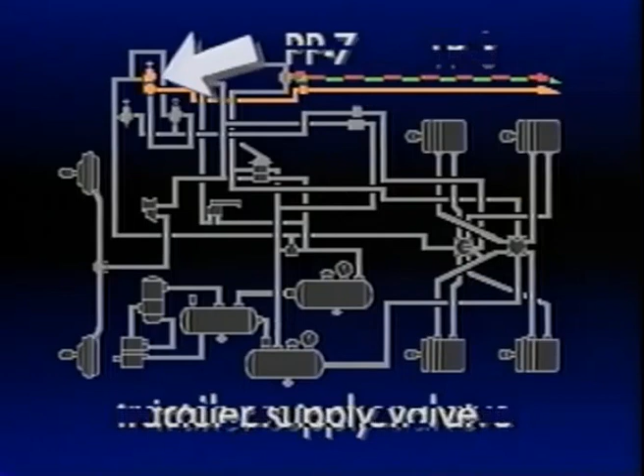There are a number of different valves that can be used. In this program, we'll look at the most basic and popular, the TP3 tractor protection valve, and a control called the PP7 trailer supply valve.

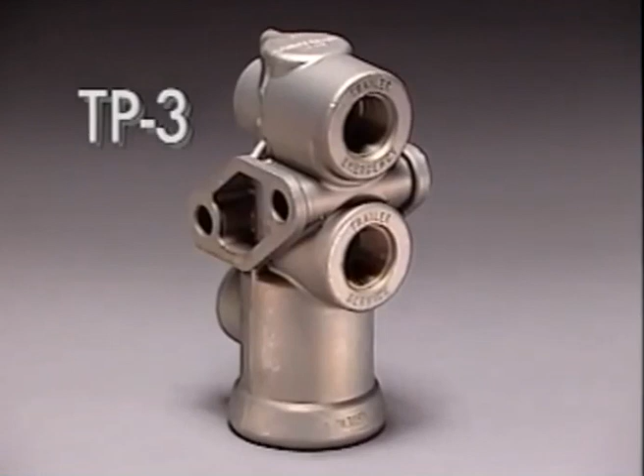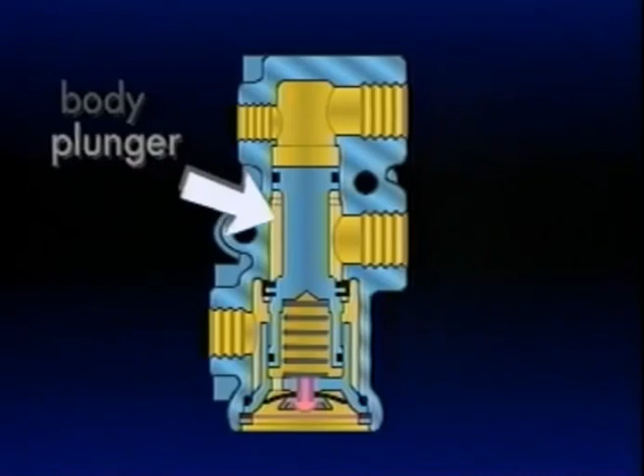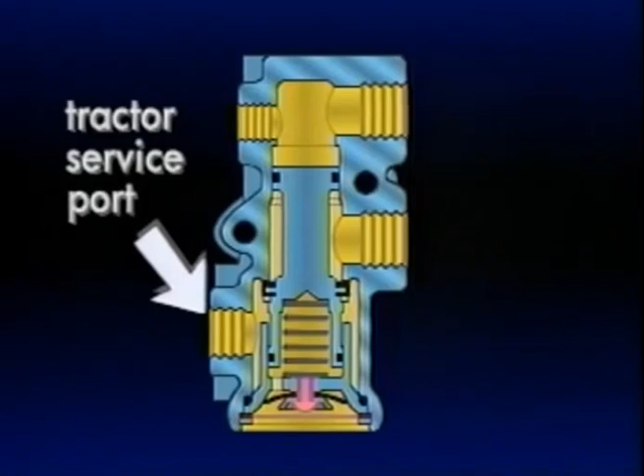Mounted at the rear of the cab, the TP3 tractor protection valve functions as an on-off control for the service line, which carries brake applications from the tractor to the trailer. The TP3 is a simple valve internally and consists of a body, the plunger with its integral service valve, and a spring. There are four air connections on the TP3, the tractor supply and tractor service ports on one side, and trailer supply and trailer service ports on the opposite side of the body. Each is identified with cast-in lettering.

Air exerts a force on the plunger as it flows through the TP3 from the tractor supply to the trailer supply port on its way to the trailer air system. When air pressure on the plunger exceeds approximately 45 psi, the plunger moves, opening the service inlet valve. With the service valve open, brake application pressure is free to flow from the tractor to the trailer brake system.

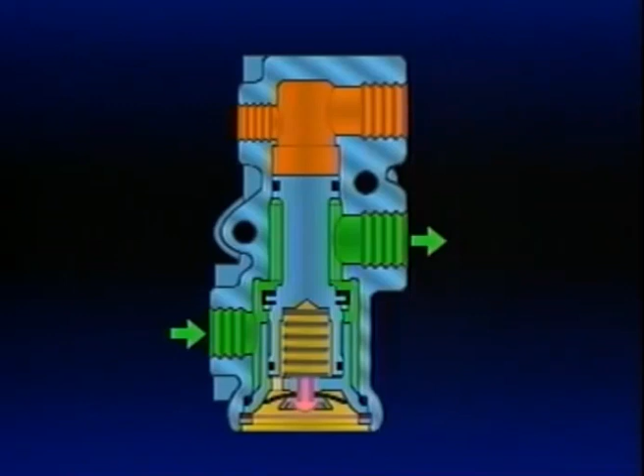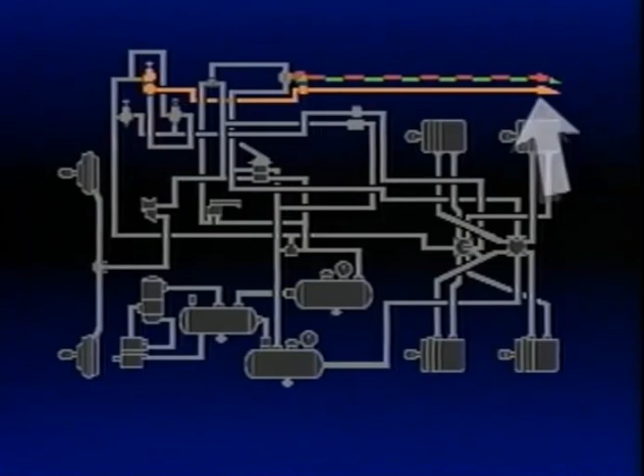The other half of the team, the PP7 trailer supply valve, is mounted on the vehicle dash and is easily distinguished by its red octagonal control button. The PP7 controls the flow of supply air to the TP3 and subsequently to the trailer. In addition, it synchronizes the tractor protection system with the tractor parking system. One-button parking control is thus achieved.

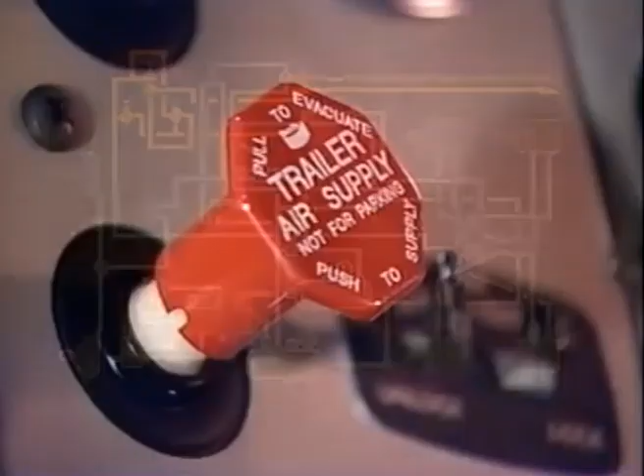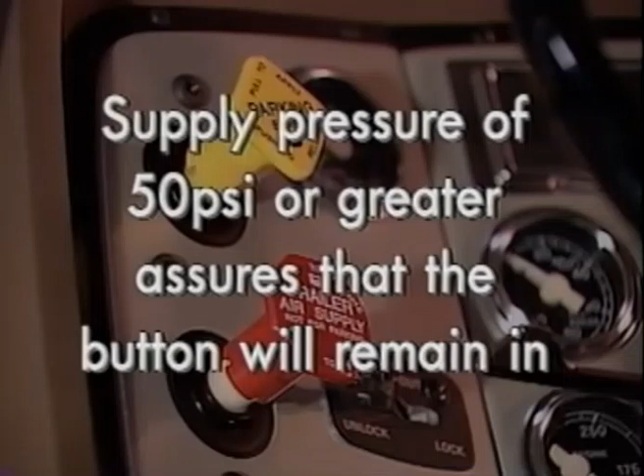Like the PP1, the PP7 button must be pushed in manually, but will pop out and exhaust automatically if the air supply drops below approximately 40 psi. Supply pressure of 50 psi or greater assures that the button will remain in until manually pulled or supply pressure drops below 40 psi. The PP7 is a combination of two pressure-sensitive on-off control valves in one body.

The upper portion is almost identical to the PP1 push-pull control we studied in Part 3 of this series, while the lower half contains an SV1 synchro valve.

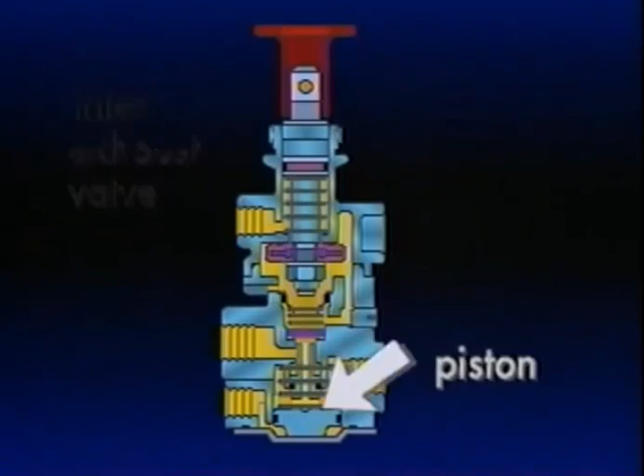The upper half of the PP7 consists of a control button, plunger, spring, and inlet exhaust valve. The lower half contains a piston, piston return spring, inlet exhaust valve, and valve spring.

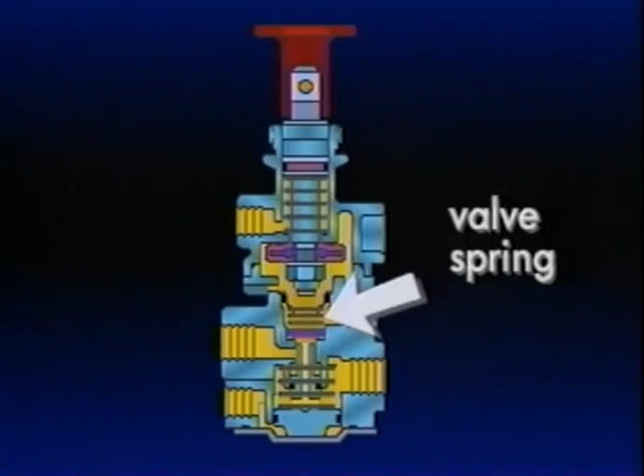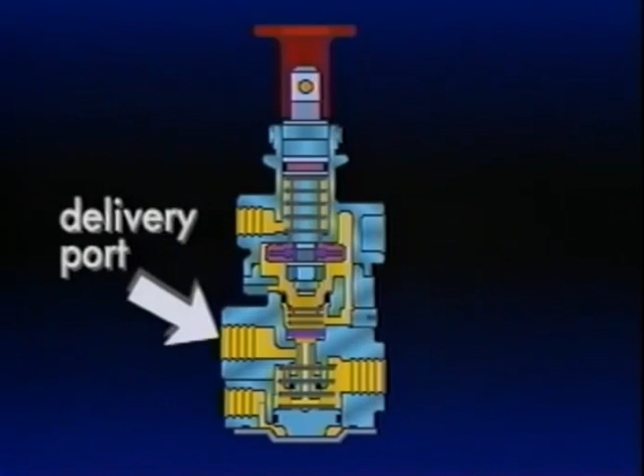In addition to an exhaust vent and exhaust port, the PP7 body has three air connections: supply port, delivery port, and control port. The supply port is connected to the same double check valve that supplies the PP1 park control. It is therefore assured a constant supply of air pressure regardless of a failure in one of the service reservoirs.

The delivery of the PP7 is connected to the tractor supply port of the TP3, and the control port is connected to the delivery of the PP1 trailer release valve.

With the vehicle parked and no air pressure in the system, the PP7 control button is out. The inlets of both valves inside the PP7 are closed, and the exhausts are open.

When tractor system pressure builds to 50 psi or greater, the PP7 can be depressed and will remain in. With the plunger inlet open and the exhaust closed, air flows from the supply port to the closed synchro valve inlet. The synchro valve piston remains down due to a lack of air pressure at the control port. The PP7 delivery port remains open to exhaust.

When the PP1 park control is depressed, air pressure simultaneously releases the tractor spring brakes and is delivered to the PP7 control port. Air pressure at the PP7 control port moves the synchro valve piston, sealing its exhaust passage and opening the inlet valve.

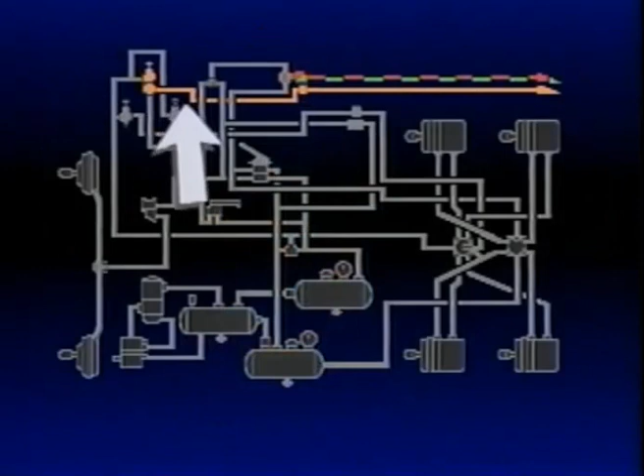Air from the push-pull section of the PP7 flows past the open synchro valve inlet and out the delivery port, then through the TP3 to charge the trailer reservoirs.

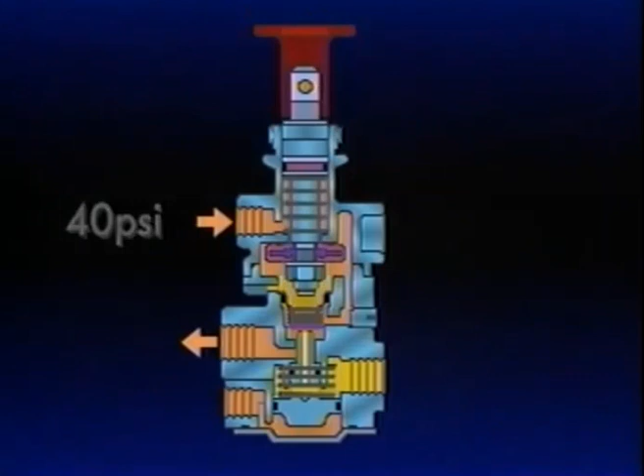If tractor air system pressure falls to approximately 40 psi during vehicle operation, the PP7 button will pop out. Air from the trailer's supply line is exhausted at the PP7. This preserves the last 40 psi of tractor air pressure and causes the trailer parking brakes to apply. Note that the synchro piston remains unaffected.

If the PP7 button is held in and tractor air pressure has dropped to approximately 20 psi, the synchro piston automatically moves into the exhaust position. Although the driver continues to hold the button down, the trailer's supply line is exhausted and trailer parking brakes are fully applied.

During a trailer breakaway or a sudden complete trailer supply line failure, the PP7 button will pop out automatically. The tractor air system will retain between 40 psi and full system pressure depending upon the location and severity of the failure. Air escaping from the failed supply line cannot be replaced through the PP7 supply port as fast as it's lost. This causes pressure inside the PP7 to drop below the 40 psi pop-out pressure, even though supply port pressure is much higher.

Because of the synchro valve section in the PP7, the tractor protection system is linked to the tractor parking brakes.

To park a tractor-trailer combination, the PP1 park control is pulled out. Air is exhausted from the tractor spring brakes and from the PP7 control port. With no air pressure at the PP7 control port, the synchro valve piston moves, seating the inlet valve and opening the exhaust passage between the PP7 delivery and exhaust ports. Air from the trailer supply line returns to the PP7 and is exhausted, causing the trailer parking brakes to apply.

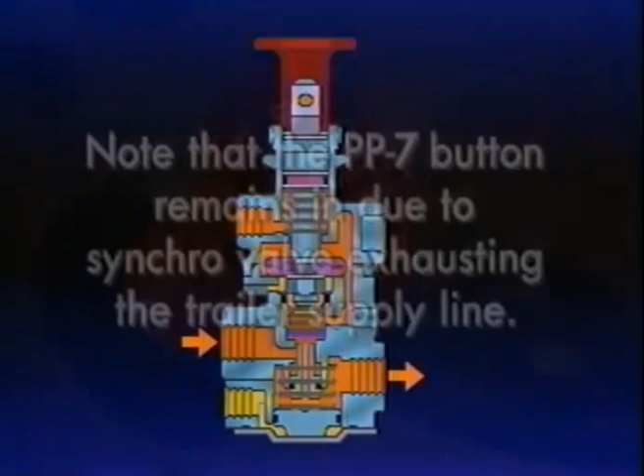Note that the PP7 button remains in. This is due to the PP7 synchro valve exhausting the trailer supply line.

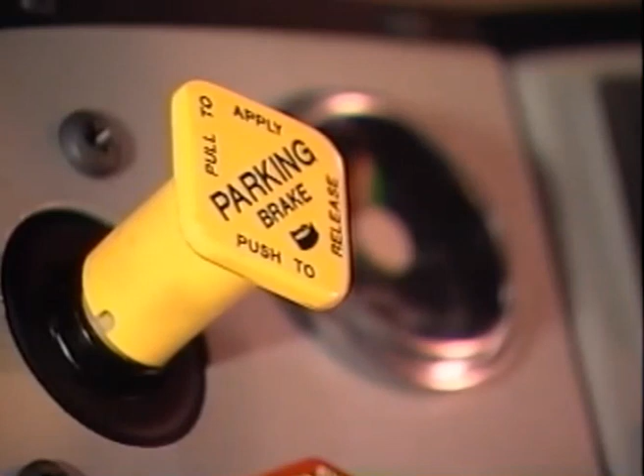Pushing the PP1 park control in releases the tractor parking brakes and delivers air to the PP7 control port. This causes the synchro valve piston to close its exhaust and open the inlet. The trailer supply line is recharged and the trailer parking brakes release.

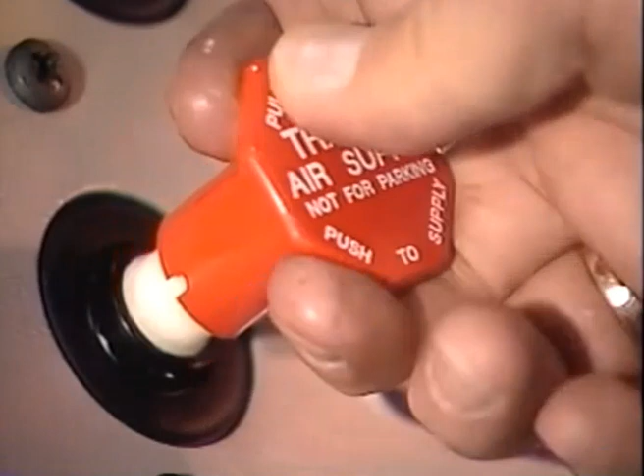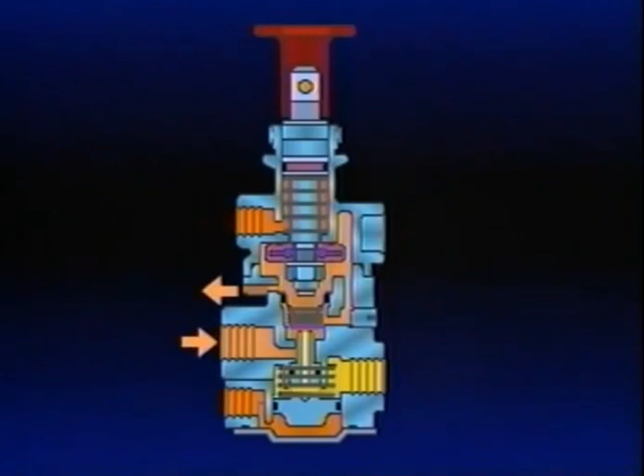To disconnect the tractor and trailer, the operator must pull the PP7 button. Pulling the button closes the plunger inlet and unseats the exhaust valve. Air that was flowing out the delivery port returns to the PP7 and exhausts from its vent.

Test the tractor protection system by pulling the PP7 out and making and holding a brake application. Apply a soap solution to the trailer service and supply line hose couplings to see if the TP3 or PP7 is leaking.

Our basic tractor system is almost complete, but before moving on, we must consider one additional device, the DS2 double check valve and stoplight switch.

We learned in Part 2 that vehicles are equipped with dual brake systems, a protected braking circuit for the front axle brakes and a separate circuit for the rear. Since there is only one service line leading to the trailer, one or the other of the two braking circuits must be chosen to apply the trailer brakes. And of course, the stoplights must be lighted regardless of which is chosen.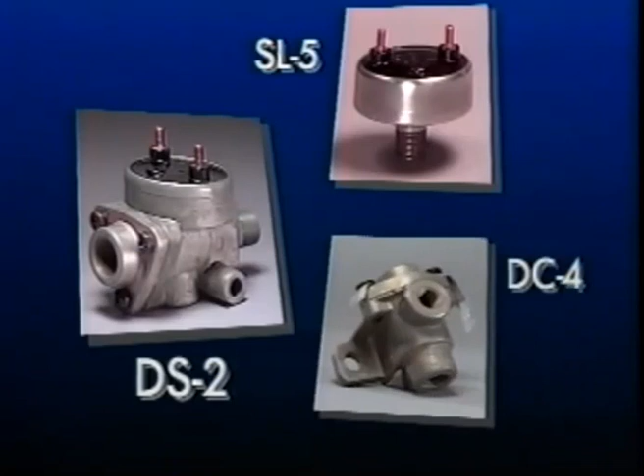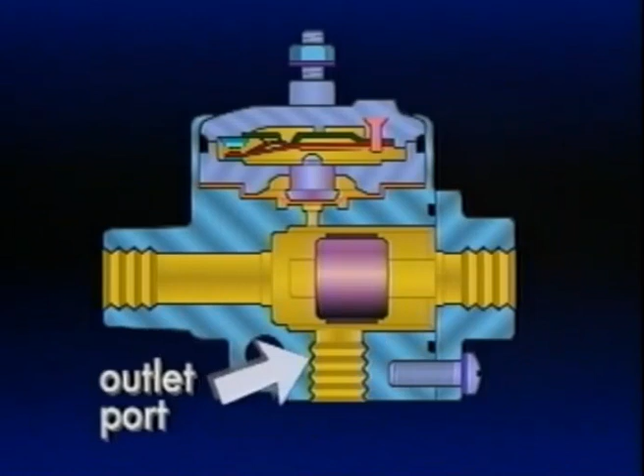That's the function of the DS2. It's a combination of two valves, the SL5 stoplight switch from Part 2 and the double check valve from Part 3. Like a standard double check valve, the DS2 has two inlet ports and one outlet port. The stoplight switch is positioned in the middle of the double check valve opposite the single outlet port. A shuttle riding in a guide travels between the two inlets.

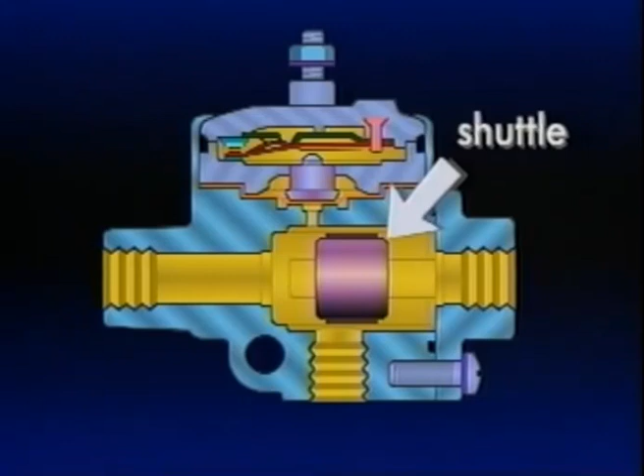Lines from the front and rear axle brake circuits connect to the inlet ports on opposite sides of the DS2. The outlet is normally mounted to the tractor service port of the TP3 tractor protection valve.

During normal operation, brake application air from both brake circuits enters the DS2 inlet ports. Since the rear axle brake circuit pressure is slightly higher, the shuttle will move to close the front circuit side, at the same time moving the stoplight piston to light the brake lights. Rear axle application air flows to the outlet port, then through the TP3 and on to apply the trailer brakes.

If one brake circuit on the tractor loses air pressure, brake applications from the remaining circuit would still flow through the DS2 to apply the trailer brakes and light the stoplights.

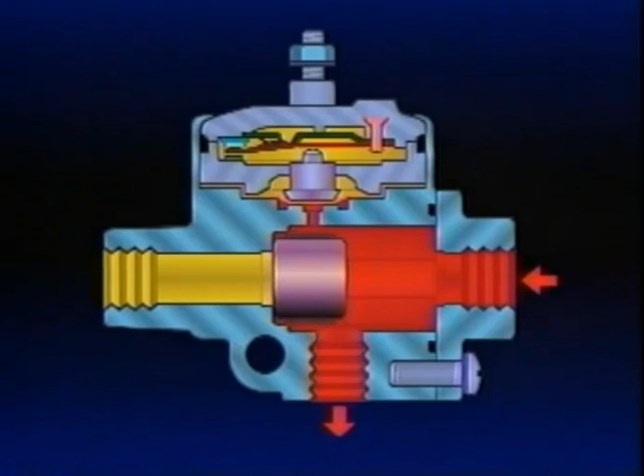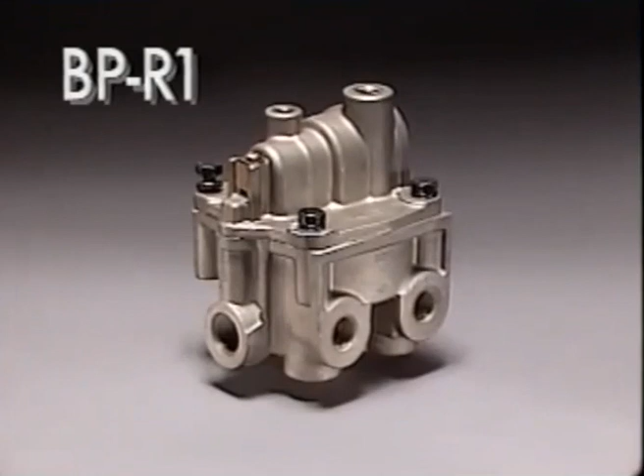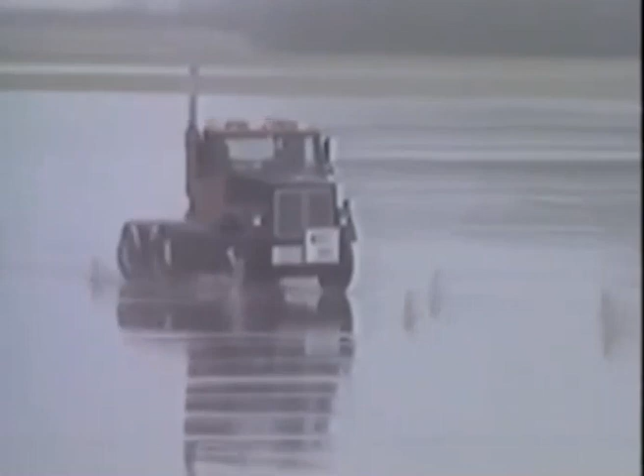Before going on to the trailer brake system, there is one accessory that should be considered: the BPR1 bobtail proportioning relay valve. The BPR1 combines a relay valve with a proportioning valve. It was designed for use in tractor brake systems only and replaces the standard R12 service relay presented in Part 2. The BPR1 improves control and reduces stopping distances by proportioning brake applications to the lighter rear axle brakes during bobtail tractor operation.

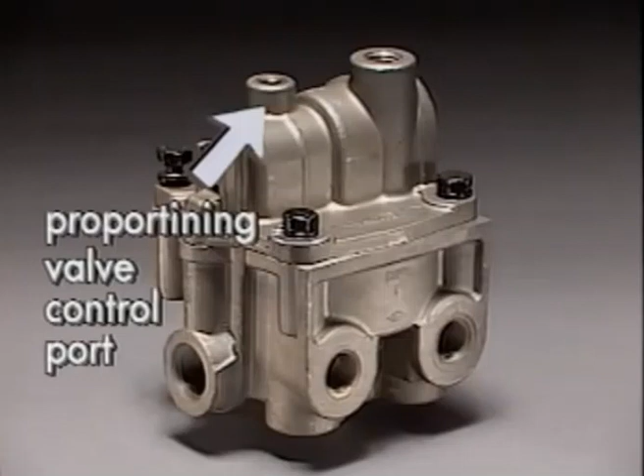The BPR1 body contains a standard service brake relay valve, while the cover houses the proportioning valve. There are 4 delivery ports, 2 supply ports, 1 control port for the relay valve, and another for the proportioning valve. All air connections are identified with cast-in letters. With the exception of the additional proportioning valve control port, the BPR1 air connections are exactly the same as the R12 relay it replaces.

This port is connected to the air line running between the PP7 trailer supply valve and TP3 tractor protection valve. During tractor-trailer operation, the PP7 delivers air pressure to the trailer and to the control port of the BPR1. So long as control port air pressure is present, the BPR1 functions as a standard service relay valve and delivers full braking pressure to the tractor's rear service chambers.

When the PP7 trailer supply valve is pulled, the trailer supply line is exhausted. Pressure is removed from the BPR1 control port, signaling that the tractor is now in bobtail operation. With the weight of the trailer removed, the tractor rear brakes are overpowered.

In bobtail operation, the front brakes are capable of doing more to stop the vehicle than the rear brakes. They can use a much higher application pressure than the rear brakes. When the driver makes an application strong enough to take advantage of the stopping power of the front brakes, the rears skid and vehicle stability is diminished.

The BPR1 compensates for this by reducing application pressure to the rear brakes only and permits the driver to apply the foot valve in a normal manner. This takes full advantage of the front brakes without locking the rears. Vehicle stopping distances and stability are improved.

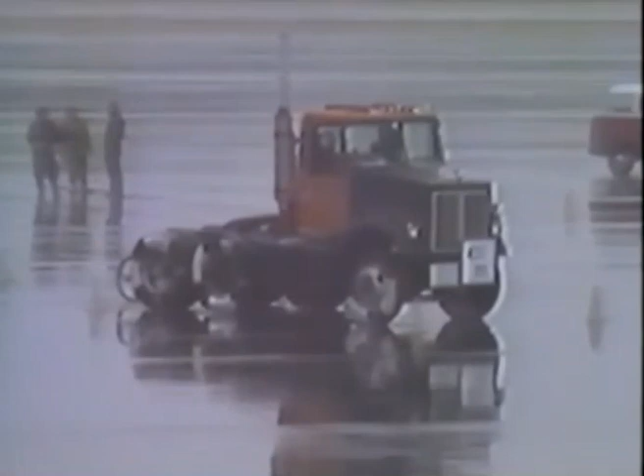Here's an important tip. Only vented dummy hose couplings can be used with the BPR1, and the vent must be open. With the addition of the BPR1, the basic tractor system is complete.

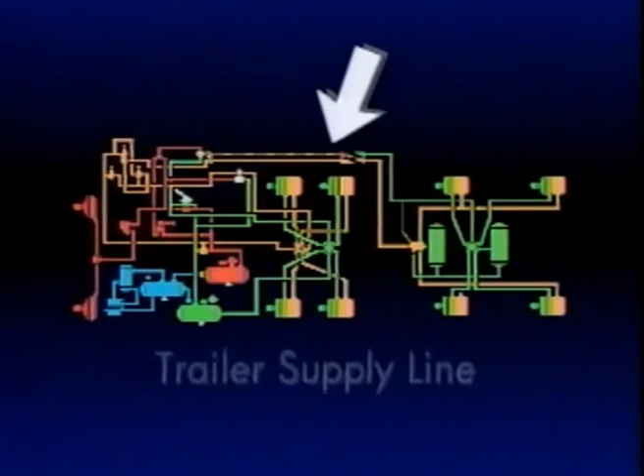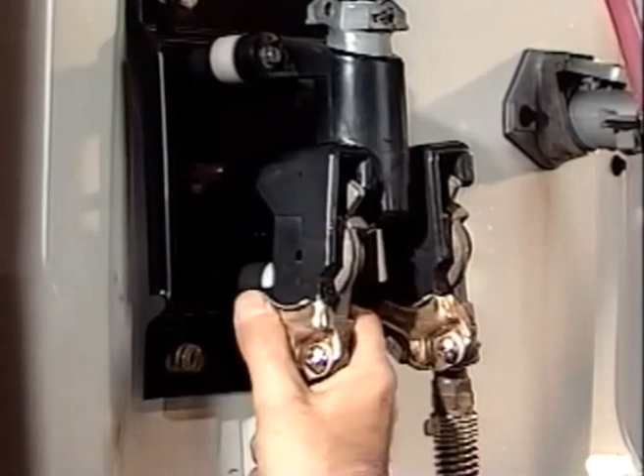Let's now turn our attention to the trailer and look at a schematic of the entire system. The two lines that carry air into the trailer, supply and service lines, are connected to their corresponding air lines from the tractor. A hose coupling, or glad hands, installed at the front or nose of the trailer connect these lines.

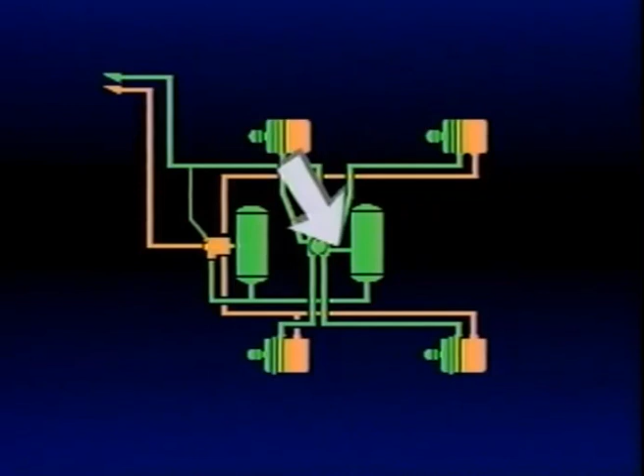The trailer reservoirs serve the same function as they do on the tractor. Two reservoirs are used because this trailer has two axles, and Safety Standard 121 requires a minimum reservoir volume for trailer service brakes. An R12 relay valve, identical in operation and function to the one described in Part 2, is attached to one of the two reservoirs. Its delivery lines are connected to the service side of 4 spring brakes, identical to those described in Part 3.

The trailer service line connects to the control port of the R12 and carries brake signals from the tractor service brake system to the R12. The R12 assures the trailer service brakes apply in unison with the tractor service brakes.

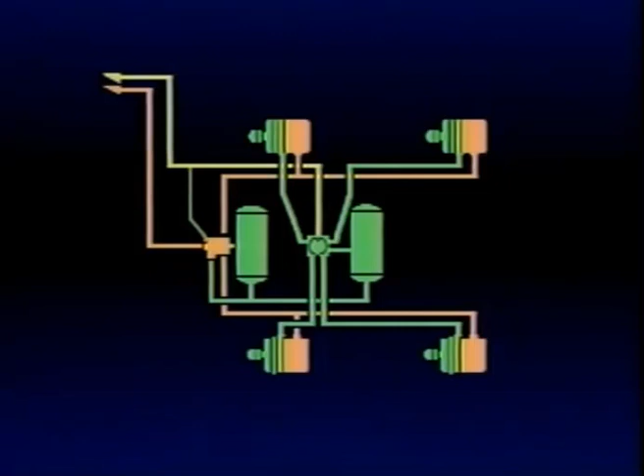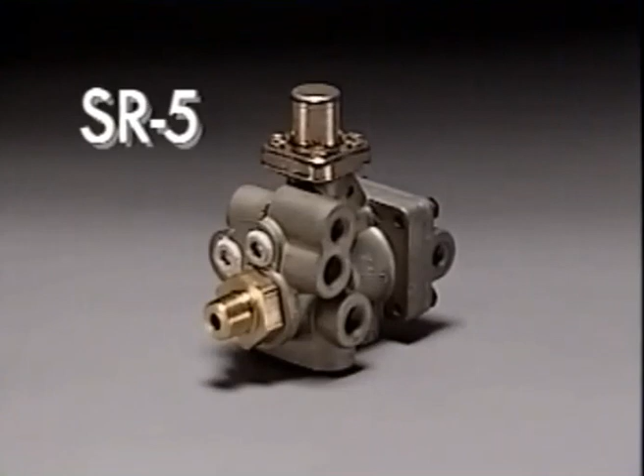The trailer service line also connects to the SR5, the last valve to be considered on the trailer brake system. The SR5 protects trailer air pressure and automatically applies trailer spring brakes in the event of a breakaway or trailer supply line failure. In addition, it permits intentional and repeated spring brake applications and releases. But it also prevents automatic applications when trailer reservoir air is lost. An optional anti-compounding feature prevents simultaneous application of service and parking brakes.

Like many of the valves we've presented, the SR5 incorporates several individual components in a single housing. A relay valve lies at the heart of the SR5 and is comprised of a control piston and inlet exhaust valve.

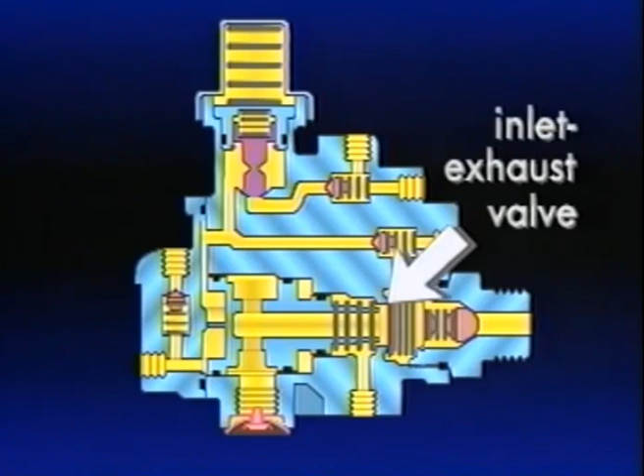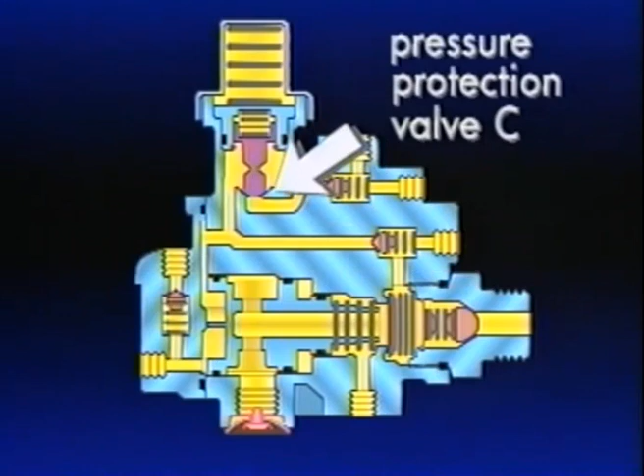Along with the relay, there are 4 single check valves, B, D, E, F, and pressure protection valve, C.

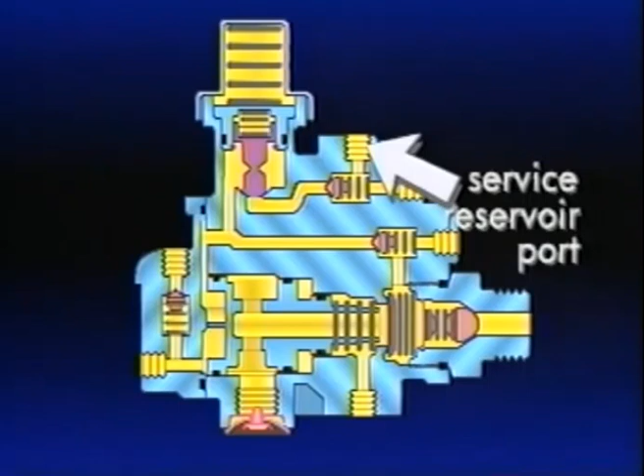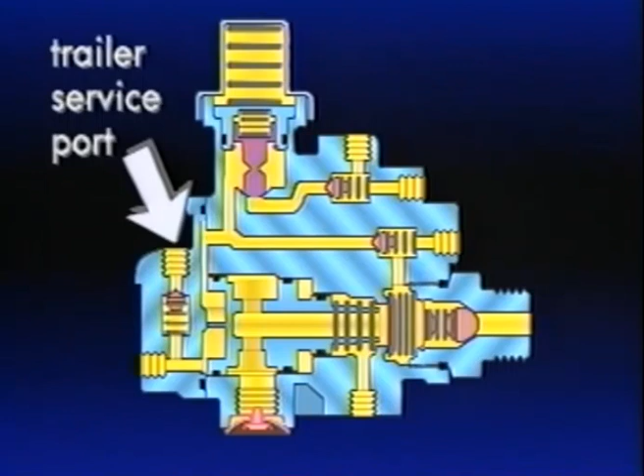A male stud is used to mount the SR5 to the reservoir. A line from the SR5 service reservoir port connects to the same reservoir. The trailer supply and service lines connect to SR5 ports with the same name. SR5 delivery ports connect to the emergency side of the spring brakes.

Let's take a look at how the SR5 operates, beginning with no air pressure in the trailer. Air flows through the trailer supply line, enters the SR5 trailer supply port, and encounters the relay piston. The relay piston moves into contact with the inlet exhaust valve, sealing the piston exhaust passage. Piston travel continues and opens the inlet.

At the same time, air flows through passage A, then check valve B, past the open inlet and into the spring brake cavities, releasing the spring brakes. Concurrently, air pressure acts on pressure protection valve C. At approximately 85 psi, valve C opens, allowing air to flow past check valve D to charge the trailer reservoirs. The trailer brake system is now ready for operation.

If air in the trailer supply line is removed for any reason, whether to park the vehicle using tractor dash controls or due to a tractor-trailer breakaway, the spring brakes will immediately apply. Without pressure at the SR5 trailer supply port, the control piston moves, closing the inlet and opening the exhaust. Air from the spring brakes flows through the passage in the control piston and the spring brakes apply. Check valves B and D, along with pressure protection valve C, close to protect air pressure in the reservoirs.

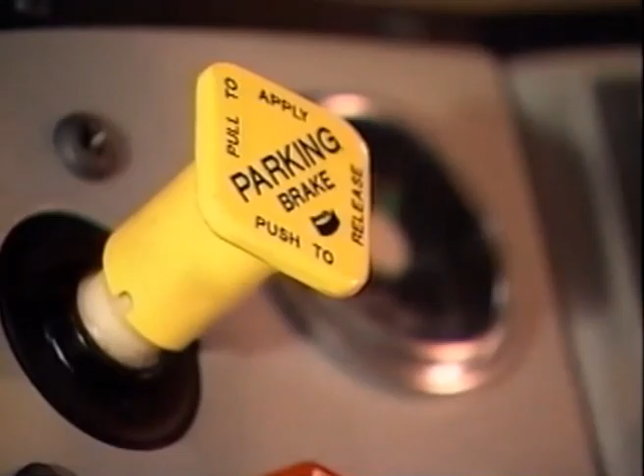If supply line pressure was exhausted due to a park application, the trailer spring brakes are easily released by actuating the dash controls in the tractor to recharge the supply line.

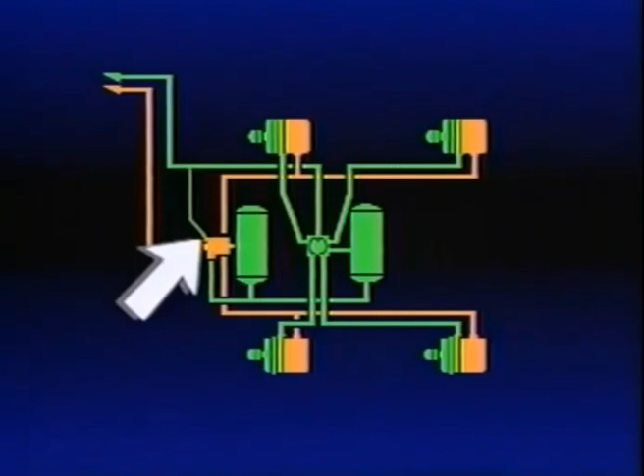The trailer service line carries the brake application air from the tractor to the trailer. That air flows to the service relay valve and SR5 trailer service port. A single check valve in the SR5 cover prevents simultaneous spring and service brake applications, which creates extra load on foundation brake components.

If a trailer service application is held at the same instant a park application is made, air in the service line flows through the single check valve, out the trailer supply line, and exhausts through the PP7 in the tractor. Further compounding is prevented by the closed tractor protection valve.

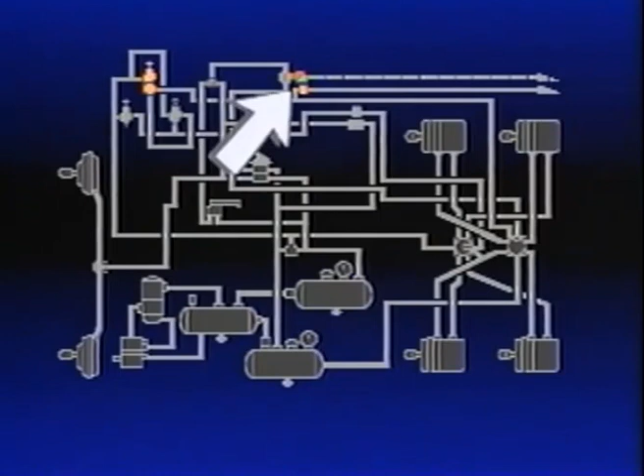Let's look at what occurs when trailer reservoir pressure is lost. First, trailer service braking is no longer available, since the R12 depends on reservoir pressure to apply the brakes.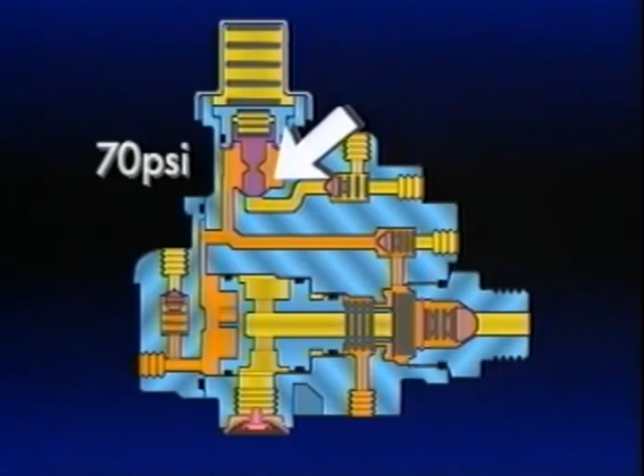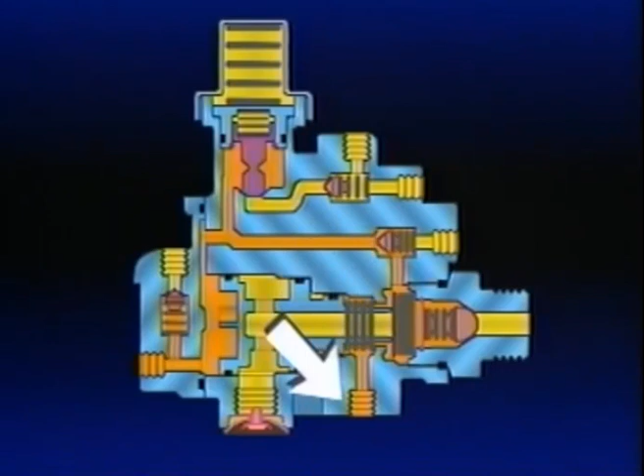Inside the SR5, pressure protection valve C will close at approximately 70 psi, retaining air pressure in the trailer supply line. The air trapped in the trailer supply line by the closed pressure protection valve will continue to hold the piston's inlet valve open, supplying air to the spring brakes. Automatic spring brake application is prevented. However, trailer supply line air can be used to apply and release the trailer's spring brakes repeatedly.

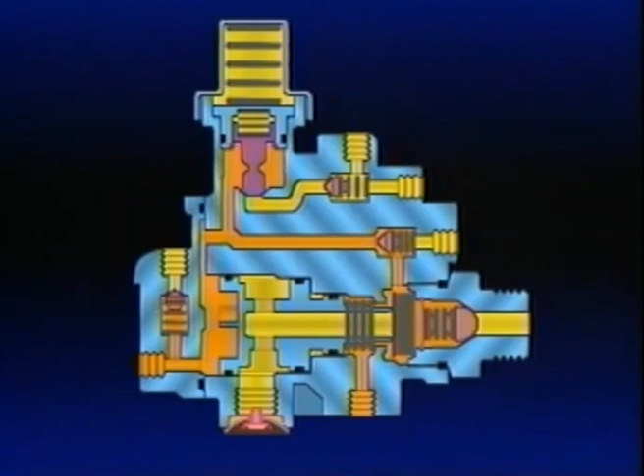Before we close, let's recap. In order to pull an air brake trailer, a truck requires a tractor protection system comprised of a PP7 trailer supply valve and TP3 tractor protection valve.

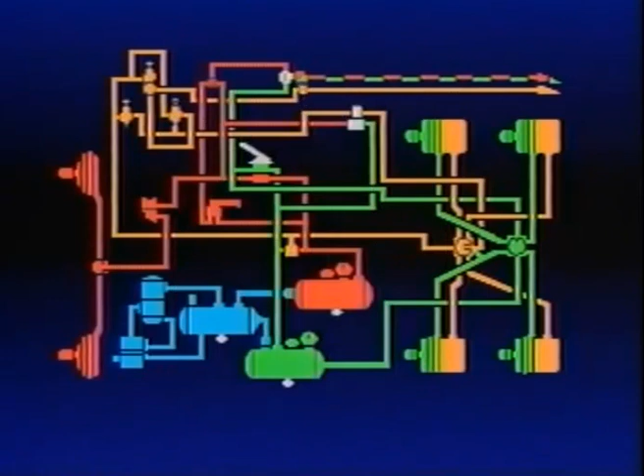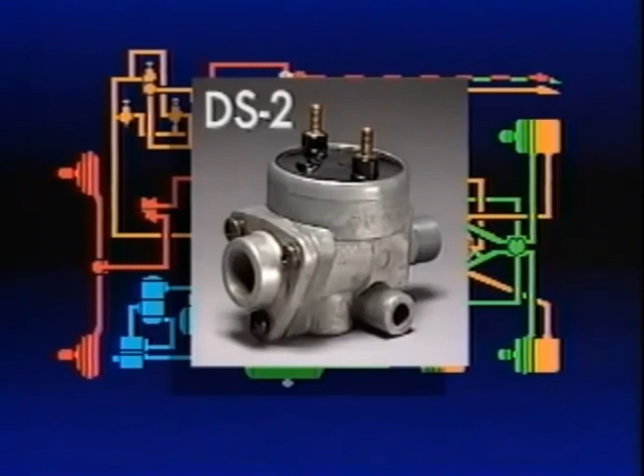A DS2 double check valve and stoplight switch selects the highest pressure from the two service brake circuits on the tractor to apply the trailer brakes. In addition, it lights the stoplights regardless of which circuit is selected.

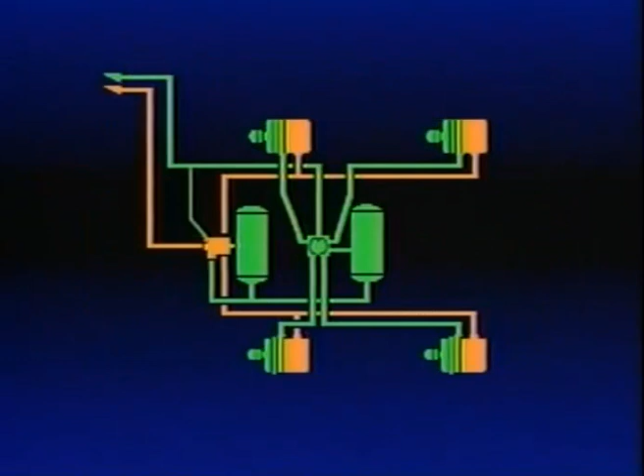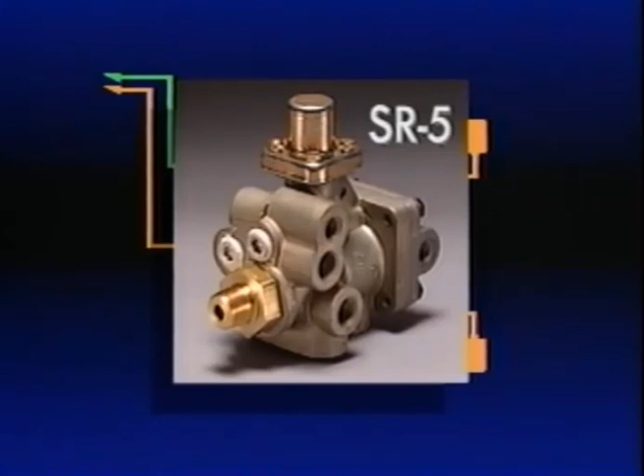The BP-R1 bobtail brake proportioning relay is an accessory that replaces the standard relay valve and provides increased brake control during bobtail tractor operation. The trailer brake system is comprised of spring brakes for service and emergency braking, an R12 relay valve like the one used on the tractor for rapid application and release of trailer service brakes, reservoirs to store compressed air for service braking, and finally, the SR5 trailer spring brake valve to control parking and emergency applications.

An enormous amount of information has been covered in this series. Should you have missed any part of this four-part presentation of a tractor and trailer air brake system, we urge you to take the time to review all four parts.

One final note: while much was covered, other system combinations and optional components are available, so the system presented is not necessarily exactly like your own. We hope you have enjoyed the presentations and that you have gained a deeper understanding of an air brake system. We urge you to review the programs frequently to maintain the insight gained.